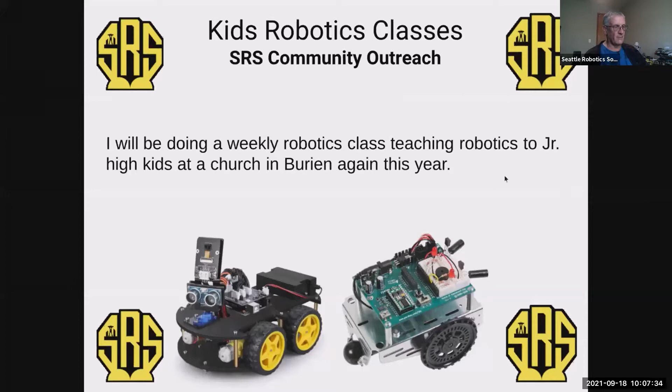I'm looking at some options, and I want to get more into programming with the kids on these things, because we did a lot of hands-on building, and the kids used the little black robot with the camera on top. I added some hardware to allow Lego bricks to be built on top of that. Kids had great fun with that, but we found the built-in programs were a little deficient, and some of the remote control stuff didn't work too well. I'd really love to show them some options for how to make that stuff better, and start to teach them a bit about programming. So I'm looking forward to doing some of that this coming year.

If you're not aware, this coming week, starting the 25th, is Drive Electric Week, promoting electric cars of any and all types - homebrew, do-it-yourself conversions, you name it. I'm planning to be at an event up in Mill Creek, about 50 miles north of where I live in Federal Way, almost to Tacoma, so this is on the opposite side of Seattle. If you have any questions, you're welcome to ask, or you can visit Drive Electric Week, which has a calendar of events across the country. Stuff is happening everywhere, so in-person events are starting up again. Last year everything was virtual, and that's just not the same thing.

Coming up a little later, we are going to have Josh Pieper, who is CEO of mjbots Robotics Systems, sharing with us about this very cool four-legged robot that probably reminds you a little bit of somebody else's robot out there. He'll be sharing about that and answering other questions. If you have questions, particularly about starting and running your own robot company, this would be the guy to ask.

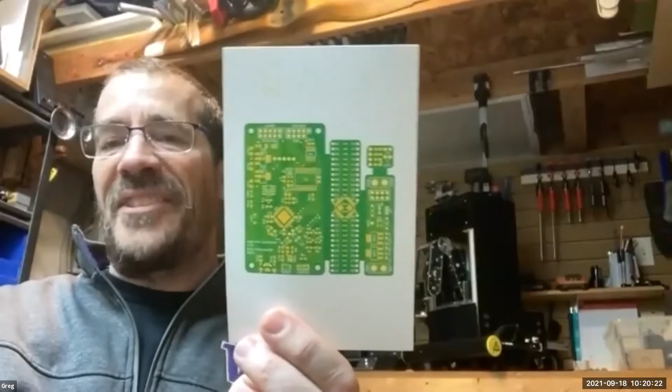I tend, when I order these printed circuit boards, this is what I actually ordered for one of those, because you can get up to 100 millimeters by 100 millimeters for the same price. So I always tend to fill in around the sides with other project boards or other little doodads, and I use that cutter to cut them apart. So I've got the cutter, and I always order a solder mask, and then I have to place the parts, obviously.

The other related project I'm working on is making a hot plate for doing reflow. Around here somewhere I have a Value Village toaster oven which I intended to use, but I like to get up close and watch it happen, so I changed my mind. I'm going with a hot plate. I bought an inexpensive cast iron top hot plate, and then got a quarter inch piece of aluminum to help spread out the heat a little better.

I'm now working on getting a couple thermocouples, and I'll put together a little circuit to control that, and hopefully have the reflow part of it covered. Up to this point I've always used a hot air approach to doing reflow, and it works, but these are bigger boards than I've ever done before, and using hot air is a very tedious approach, sitting there doing it. I could set up something else.

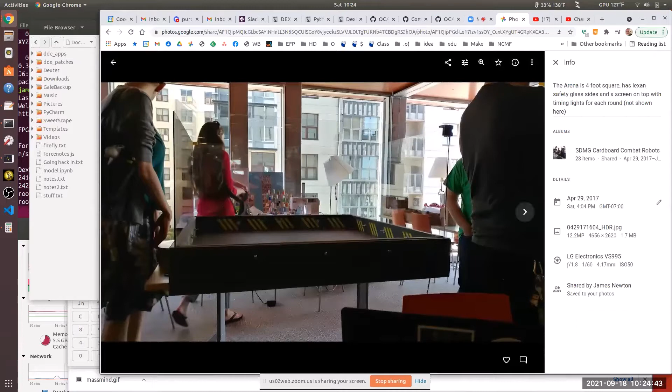Hey, I want to make a pitch real quick for this little cardboard combat robot, for people who are teaching classes with kids. This is something we came up with a while back, with the idea that we wanted to make it really popular for kids to get into robotics. We thought one way to make it more popular was if we built an arena, so we have Lexan sides and a piece of a little arena, and eventually we built a top with lighting and all that kind of stuff with timers.

And we made these with the Node MCU, the little ESP8266. I don't know if anybody's played with those, but they do Wi-Fi and will serve web pages. You can actually program this thing to serve web pages. These are available if you buy them from China for like $2-3 a pop, $8 on Mouser or DigiKey, or you can buy them from Amazon from good reputable sources. And they're programmable with the Arduino IDE with a little bit of tweaking.

This was the first version with these cheap DC gear motors. Then we went on and made other versions that used servo motors, and there's a channel for an ESC, so you can put like a regular RC motor on there. This was one of the weapons that a guy came up with, 3D printed with a bunch of screws in the front, and here's another one.

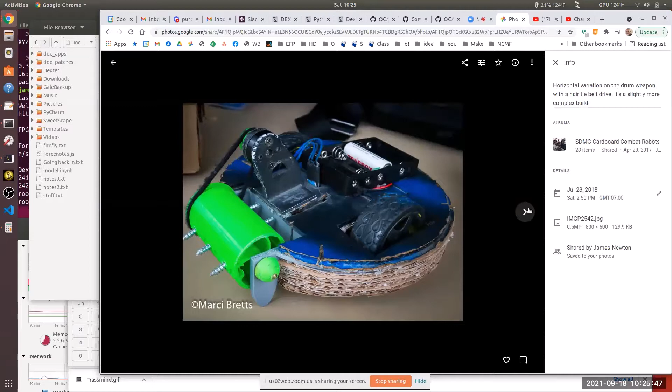Same guy made this one, but it's a drum weapon instead. You can see the little RC motor up here in the belt that was running it, and then he has his gear motors running everything there.

You'll notice some of these look a little bit the worse for wear, and that's because we put them in the arena and battled with them. That is after on that particular robot.

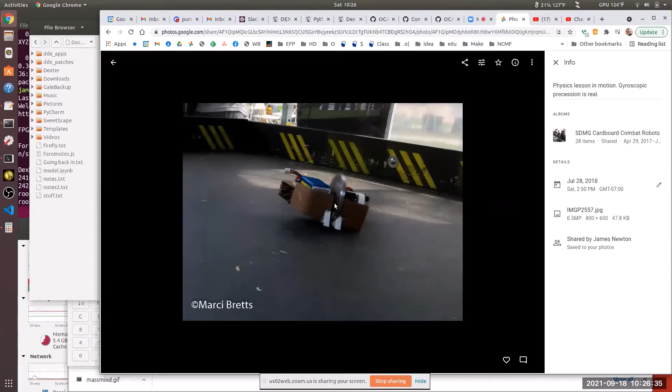That's a spinning disc with an RC motor directly connected to it. It's at an angle there because that thing is spinning so fast that the gyroscopic precession lifts it off the ground whenever he turns it. This is the STD, single tooth disc.

And not all of them were combat bots. People made art bots, and people made just the simple cardboard bot.

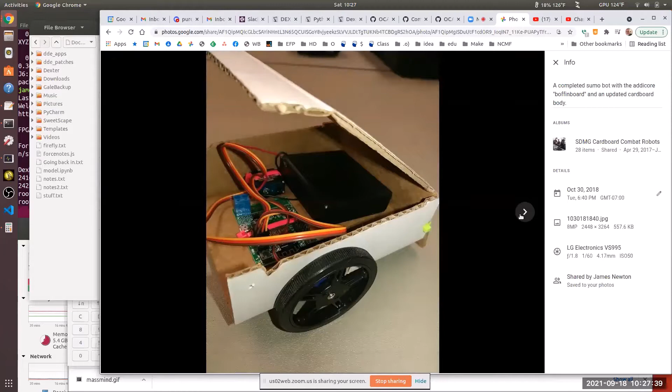It's a couple of servos, hot glue the thing together, and a kid can have that up and running in short time. And if they go in combat with it, and it gets destroyed, it's no big deal. Most of the time the electronics survive, and you can just cut out another body and put it back in there.

These are for a Sumo Bot competition that we did. And this is a way that you can bodge together a servo connector off of the digital pins on this Node MCU version of the ESP8266, just pulling the battery power over into the power and ground rails, and then you can plug in servos on the side.

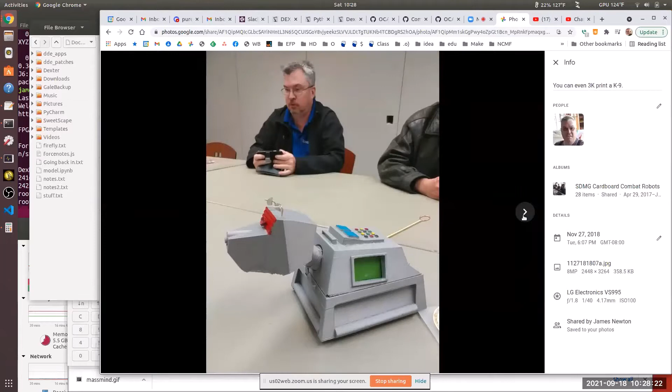Like I said, I've made an adapter board that makes that a lot easier, because that's some pretty tough soldering. It's small. We made a few of those with some groups. There's a 3D printed body that uses the same thing—you can see it there, a little canine.

More than that, another web page that the robot can serve is an editor. So you can edit the files on the robot using a web page on your tablet or your PC or whatever, and then reprogram the code that's in this web page.

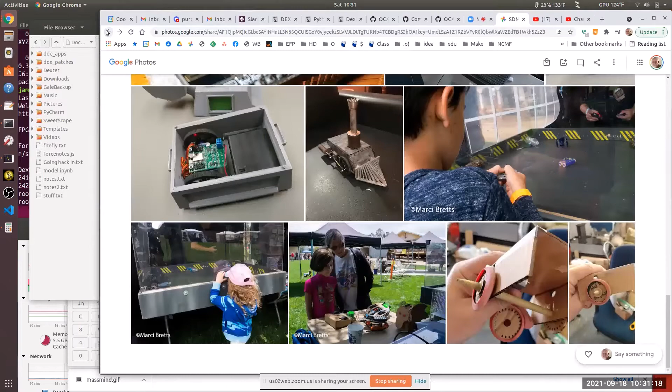Somewhere I have a video showing the self-driving thing, but I couldn't find that in short order. So again, the big advantage of it is that it allows you to have not only the regular programming via the Arduino and C code, but it also supports the programming of what's going on inside the cell phone.

One of the things that I'm not doing, and I would love some help with, is we aren't able to access the sensors in the phone from the web page served from the robot, because phones lock out HTTP non-secure web pages. They won't allow a non-secure web page to access the camera and other sensors in the phone. So we want to upgrade to the ESP32 so that we have enough horsepower to serve HTTPS web pages from the robot, and then we'll actually be able to access the cell phone's sensors.

The idea there is to actually just set the cell phone on the robot, and then you have a fully autonomous robot with the power of your cell phone communicating with the robot via Wi-Fi through a web page that you can edit from the cell phone or from a tablet or whatever. I think it's a really exciting project, and I would love to see more people get involved in it.

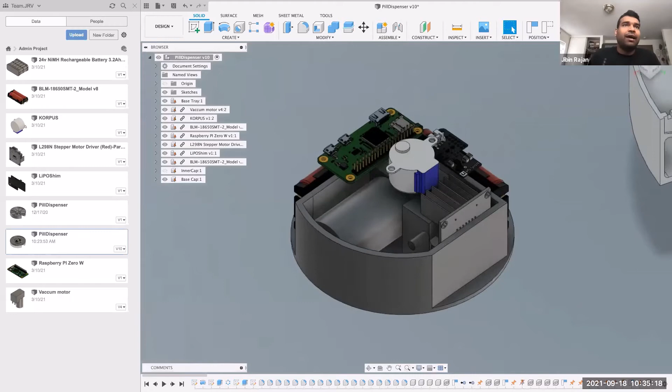The idea is basically to have a small servo motor attached to the other end with an arm so that I can pick pills from various boxes. And here there would be a dispenser, like a cup that can be used, and the rest of it is all software within a Raspberry Pi Zero, which can trigger alerts and trigger these systems to pick the number of pills that are needed according to the frequency my parents would want. This would have an alarm or sound system, connected to Google Home or something like that, so it would alert them at the right time to eat the pills that are in the cup at whatever time they want to take it.

So I wanted to fabricate this and make at least a proof of concept sort of system, which I could take home the next time I go to India. That's something I don't know if it interests a lot of people, but it's something I needed help with because I don't have ready access to a lot of the fabrication stuff like 3D printing.

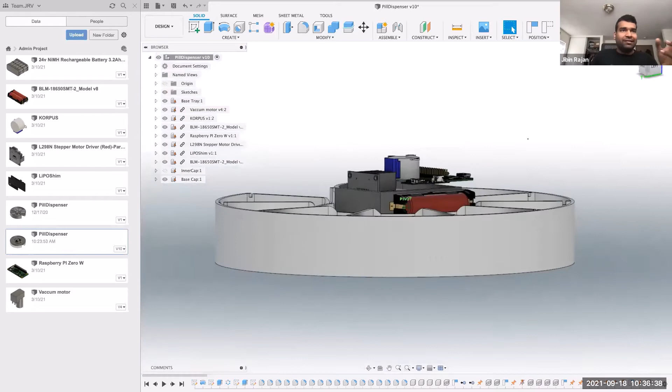I would also like to get expertise from people on how to put all of this together so that everything works right. The idea is to make it so simple that it could work for my parents. I'm pretty sure there are a lot of old people out there who don't take their pills on time. So if it works for them, I want to turn it into a more full-fledged product that can be reused by a lot of people.

That's why this design, if you take a look at it, is basically pills in a box fed by gravity, so the pills are always available at the bottom. And this gripper that I tested works with almost all kinds of pills, so it's agnostic to the shape of the pills.

The idea is to make it really small, so it should ideally contain just a base cap and a top cap, and that should be about it. You just load the pills into this, and then set the frequency of the number of pills to be taken from which slot.

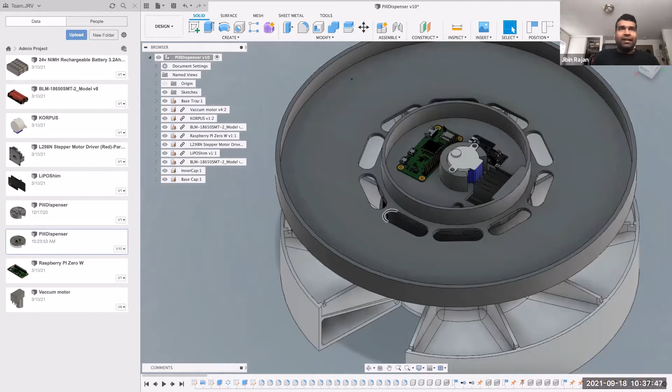Once all of that is set up in the software, the servo motor would have an arm and a small mechanism to go down into the pockets and take the right pills. With just that, it should be cheap and easy to manufacture, which is what I want. So I reduced the number of parts in the mechanism as low as I can.

It's literally just 2 motors, a motor controller, a servo controller, a Raspberry Pi, and normal batteries around it. So I would like your inputs on this design, and I'd like to know if anyone can reach out to me. I'll share my email so that if someone can help me out with fabrication or how to bring it to fruition, that would be really awesome. That's about it for me.

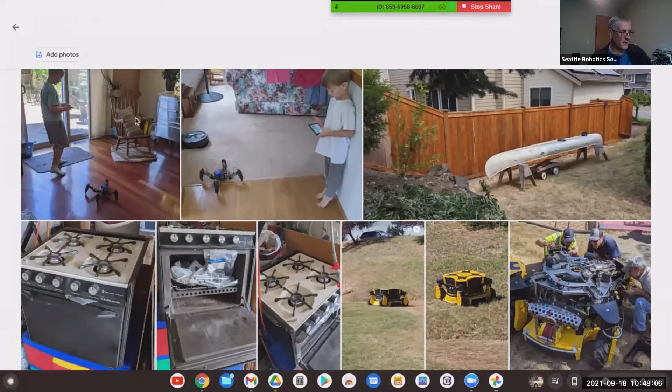Seeing Google Photos there and seeing some pictures?

This is what my niece's son is playing with, one of my little MekaMons here, a little four-legged spider type robot. He and his brother love these things, but you can do battles and other things with them. They thought that was pretty cool.

This is a little guy, he's 4, actually I think he's almost 5 now, but he's a neighbor across the street, and he was having a pretty good time playing around with one of these little guys too. It's amazing how easy these things are for little ones to play with.

And back to this, the vacuum, one of those Shark vacuums that's self-emptying. It's got the vacuum base, and then it has a video camera on top of it, so it maps your house and then it can figure out where it is. That's pretty cool.

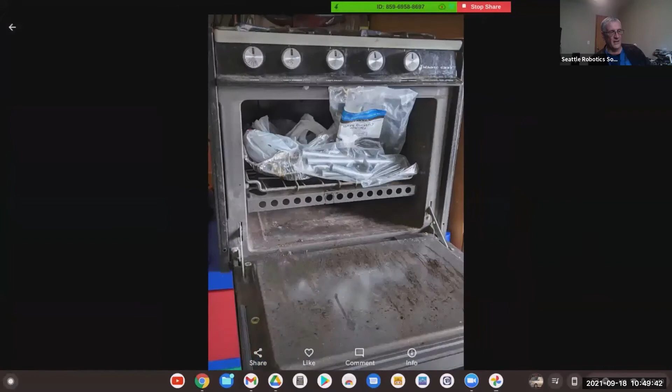So anyway, back to robotics.

This was serendipitous. My wife and I went to a park, and these guys pull up, this guy pulls up in a beautiful brand new pickup truck with this interesting machine in the bed, and apparently it's for cutting grass on steep hillsides. As you can imagine, if you're on that hillside sitting on a riding mower or trying to run a push mower up it, that can be pretty challenging.

So this little thing has 4-wheel drive. You can see that the 4 wheels allow it to translate in its movement, so it can go anywhere. It's being remotely controlled, as far as I know it's not autonomous in any way, but it is remote control. I'll show you a picture of that.

It has a winch that can be used, on the opposite side of what you're looking at here. He demoed that for some guys from the Park Service that takes care of grass cutting in these places. You can take that winch and hook it up to, let's say, a tree or a vehicle sitting up on top of the hillside, and then the robot can keep its position or pull itself up the hill. He said it can go up to about a 50-degree angled slope pretty comfortably.

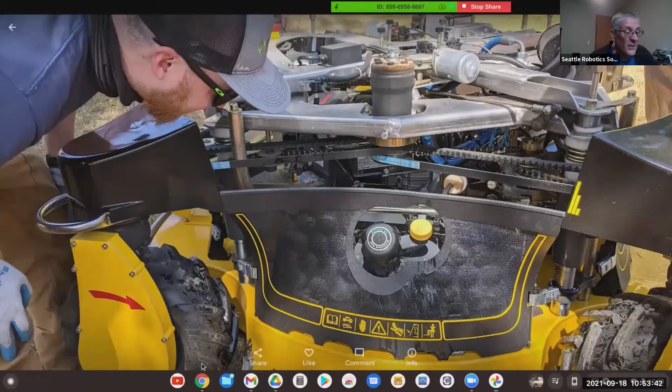You can kind of see on the tires there, some of the oil. You could see it was wet all over the place inside, but yet when he would start it up, there was no sign of oil leaking from anywhere. So it was kind of strange, almost like it healed itself, but I'm guessing it didn't really do that, because machines, if they leak, there's a good reason for it.

And I love these situations where somebody else's robot is having trouble, and it's everything you can do to control yourself from wanting to dig in and fix it. Right? Tell me you didn't want to do that. Oh, it was tempting. I was asking them questions about it, but trying not to, since the guy was there to do this demonstration for these park service workers. I didn't want to get in the middle of that, but at the same time, it's like, oh, this is just a really cool machine. Tell me more.

I did ask some of them though, I said, well, how do you guys normally cut this grass? And they were talking about things like, you take a push mower and tie a rope to it, and you stand at the top of the hill and lower the thing down and pull it up, lower it down and pull it up. It's like, yikes, that was a pretty good sized hillside altogether, so that'd be a lot of work to do that. And getting around, because of the trees, you wouldn't be able to stand at the very top of the hill because the tree would be in the way, so you'd end up having to go around to the hillside of the tree to get down there. Not a pleasant proposition.

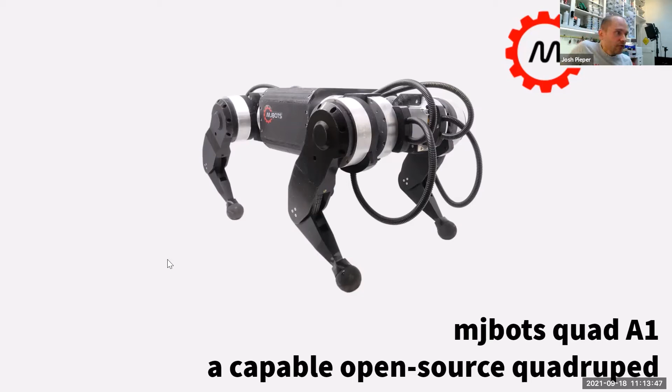This is me, Steve already introduced me. I got my professional start building autonomous underwater vehicles at Bluefin Robotics.

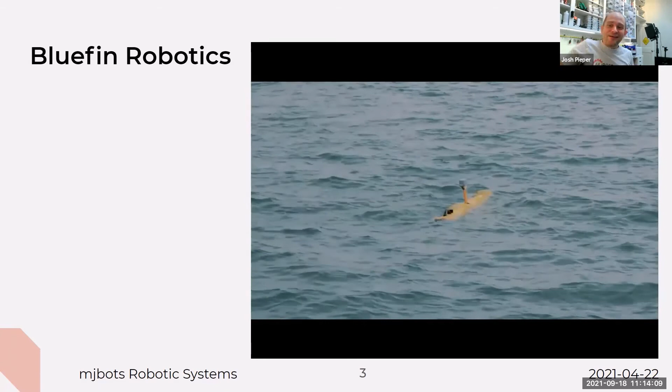Those are marine systems. People were mentioning earlier that high voltage and water don't mix, and I can attest that it's definitely true, especially with salt water. It's even worse. Fortunately, the software side of these systems was fun but not terribly hard, because robots just assume the entire ocean is free and you can go anywhere you want. If you hit something, you got unlucky. But a lot of the work was maintaining fault tolerance and dealing with high voltage electricity and corrosive salt water, making the machines continue to work.

Carl, I had to exit my browser and start over again. And when I came back in I had no audio, so I had to do that again. The second time I came back in the stars aligned. Okay, I'm going to jump out and in again. I'm trying to use the Zoom client on Windows 10 and it's just not behaving right. Okay, I'll be back in a minute. Well, let's just blame this on Zoom. Everybody's good with that? Steve, I don't think it's anything you did, it was too coincidental that Zoom wanted to update. Do you think Zoom pushed an update in the middle of the meeting? They did in my case, they forced it on me, and now it's behaving like crap. Oh jeez, I'll be back in a minute.

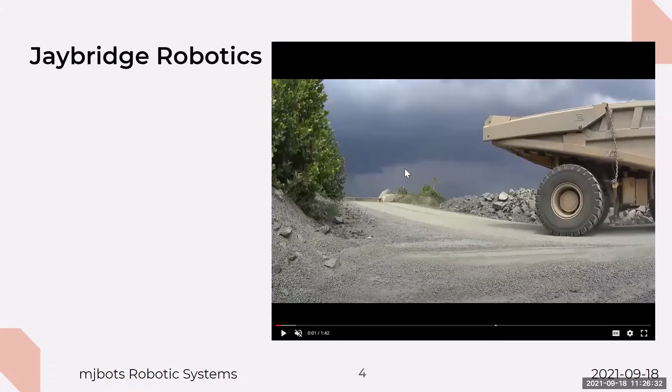Let me try to share my screen again. Which one do I want? This one, perhaps. Can everyone see my screen share again? Yes, great. Were you able to see the videos I was playing before? People who were on, yes. At Zoom frame rates at least? All right, see anything? No one. Well, I will continue, if at least someone can see it I'll call it good enough here, and I'll leave the rest for recording. Oh, let me jump in for just a second - if anybody doesn't have their mic muted, I will follow suit and do the same. So please mute your mics.

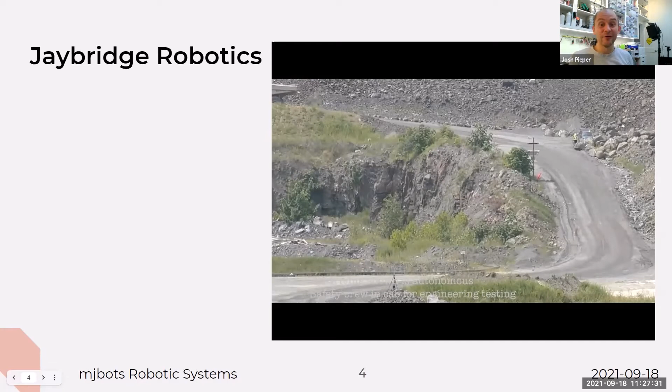Great, so back to where I've worked. At Jaybridge Robotics we developed automation for off-road industrial vehicles. This is a video showing a quarry automation system we developed, which would let one vehicle record a path, and then you could have any number of vehicles follow it, which is common in a quarrying situation. There'll be like 2, 3, 4, 5 trucks all doing the same thing all day long, going from where they're blasting the rock to the crusher where they crush it.

We also developed a system for agriculture and tractors that could automate harvesting and planting. The coolest part for me was when random people would drive by and see our systems operating. This is a random YouTube video from some passerby who saw our tractor driving along with no one in it and was like, what the heck is this? It's just going around doing its thing. That was some of the coolest part about professional robots, getting to see things work, because this would just go all day long, going back and forth between collecting grain from a combine and taking it back to the semi-truck all day long.

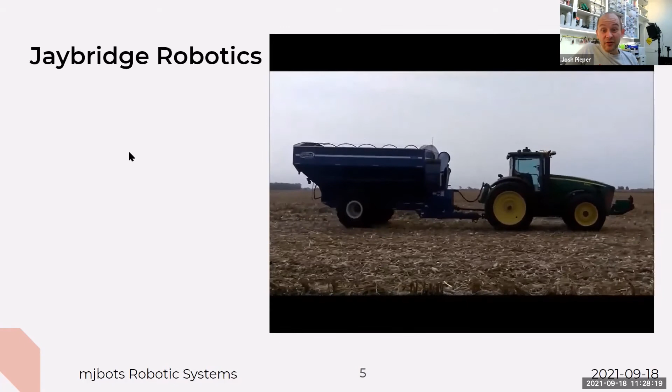I don't know if Steve has a place for these. They're all public YouTube videos, so eventually if you want to see the whole thing, you can switch to those.

We took Jaybridge, both ag and mining, had a really rough stretch, so we sold the company to Toyota Research Institute, and I worked there for a while on their self-driving car program. This is some semi-marketing speak covering the platform. I mostly worked on their software systems, developing the infrastructure that recorded gigabytes per second of data from many sensors and let researchers analyze that and make sense of it to develop new algorithms.

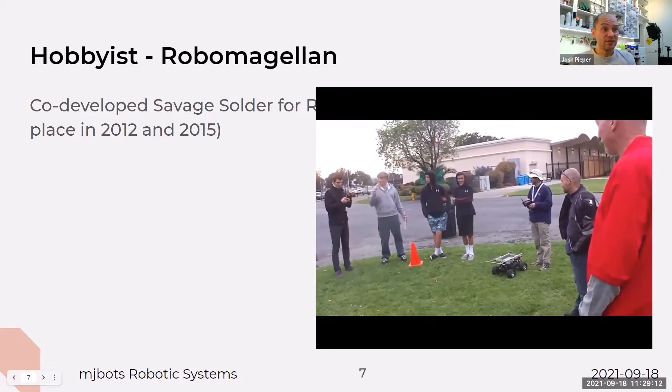Let me switch on here. I've done a lot of hobby work as well. A friend and I from Jaybridge entered in a number of Robo Games competitions. This is Robomagellan, which was founded at SRS long ago. Thank you SRS for that.

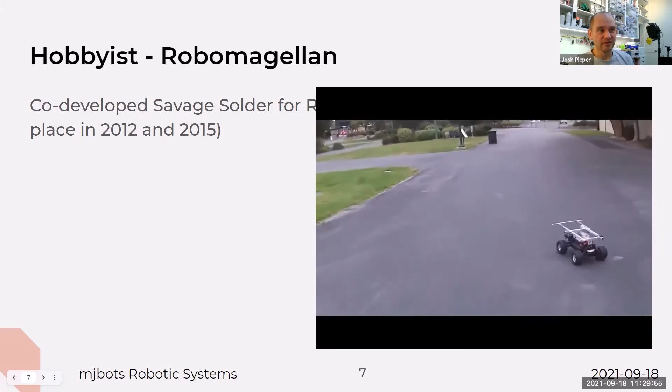We did this just for fun at Robo Games in San Francisco. Of the 3 years we entered, we won 2 of them, and one year the machine destroyed itself. But those competitions are a lot of fun. This is just an off-road RC car, this version has an Odroid. The first year we just strapped a laptop on top, same basic software. When it was running well, it could go pretty fast, like 12 miles an hour, and it used vision to identify the cones, and didn't use vision for anything else aside from seeing the cones in Robomagellan.

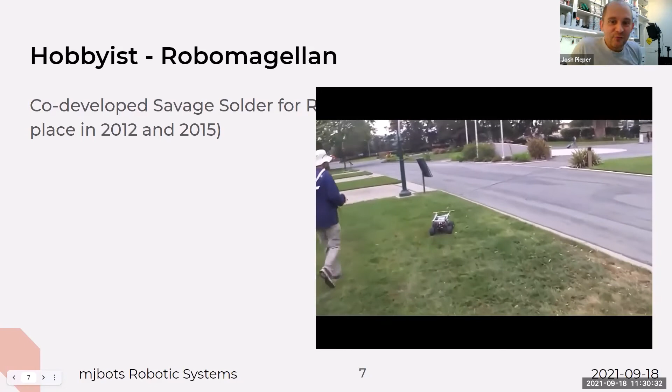It just used a relatively accurate WAAS-capable GPS, which was enough to drive through the narrow spots in the San Francisco course. This video was our winning run in 2015, where they, perhaps expecting no one would hit it, put a cone way out in the back, which they denoted as a 0.001 time bonus cone that they assumed no one would manage to hit. We got it, which made our official time be like 2 seconds for the run, making it the fastest timed run in their history, but not because it was particularly fast, just because we hit this hard to find cone.

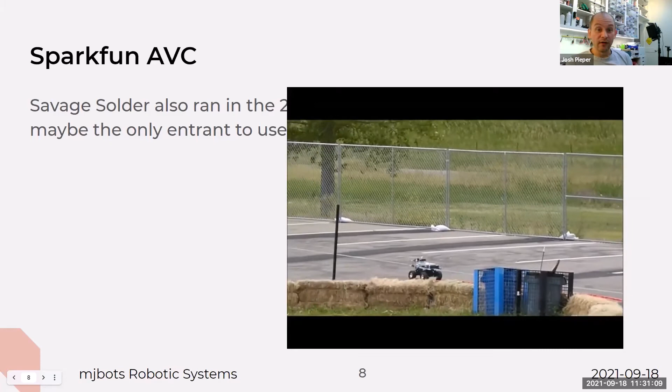A similar version of the car also ran in the Sparkfun autonomous vehicle competition for a few years. In that event you just go around a track. The years we did it, they had various obstacles or bonuses you could hit. This year there were barrels you had to avoid, a hoop you could go through, and a ramp you could jump. This version was maybe a slightly older one with a mini ITX computer inside an aluminum case, but it used cameras to avoid the barrels, go through the hoop, and jump over the ramp as it went through the course.

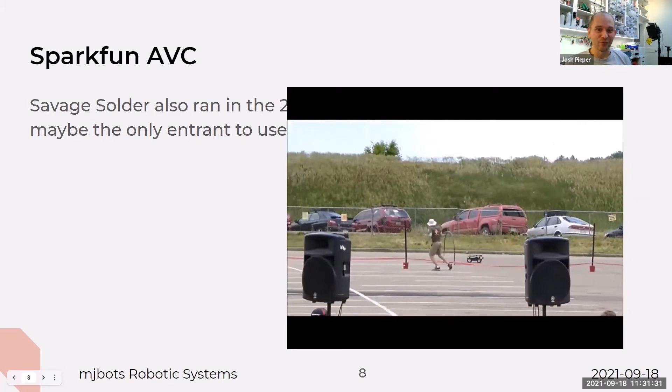I think we got second place one year in this event. The rules weren't as forgiving, they were very biased towards consistency, and ours was high performance but not necessarily the most reliable. So we'd get like 2 runs that would work and 1 run that would explode for some reason. But I'll let this one run until it hits the ramp, because this event had a ramp which was very perilous - you'd either hit it all the way or miss it, and if you got it part way, usually your robot would crash. So here we used a camera to find it so it could take the ramp and go over.

Let me skip ahead then. For some reason all my slides lost... oh, that's what happened. Well, anyway, the text is missing on all my slides.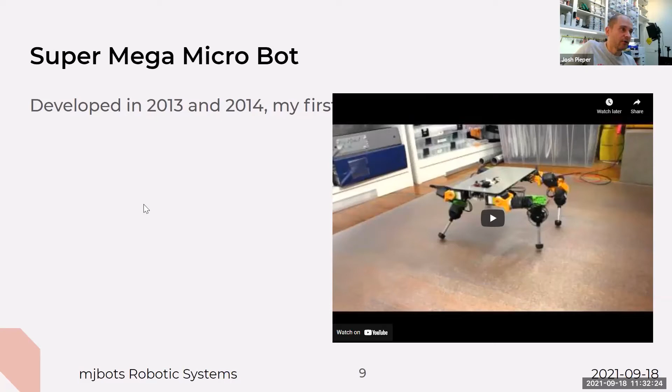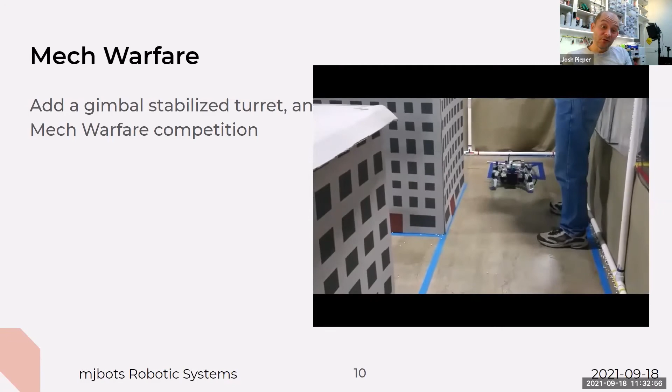We took that system - this was the same friend and I - and put an inertially stabilized gimbalized airsoft turret on top of it and entered it in the Mech Warfare competition, where you get to FPV, so teleoperate the machines and fire against detector targets on other robots. This was a lot of fun. Once again our machine was very high performing when it worked well, because we could shoot while moving, which no other machines could do. The downside was that it used USB and all kinds of other stuff, so occasionally it would flake out and just die. This was a run where it won because it was able to shoot while walking around because of the stabilized camera and video.

So that's a little bit of my background.

Now I'm going to go into the story of this Quad A1's development. I started from that hobby servo machine back in 2013 and wanted to make something more capable of doing dynamic maneuvers. But there's a lot to do from going with off-the-shelf hobby servos to a machine that can run fast over open ground.

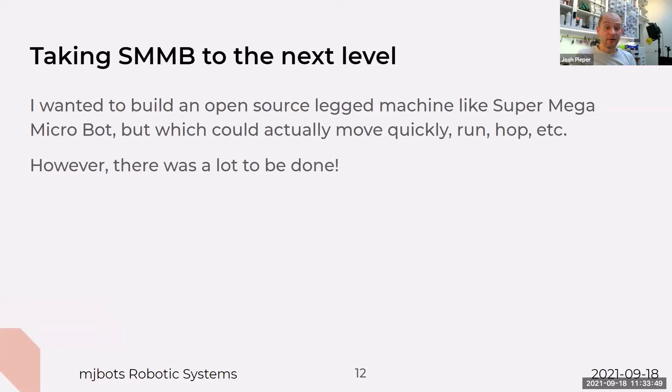For the purposes of this presentation, I broke it up into 3 semi-discrete thrusts, although in practice it was all kind of intermingled craziness, as you'd imagine with a complex project where lots of things were happening.

One was doing motor control using field-oriented control to control brushless motors. Another was building a reducer for those so you can have higher torque and lower maximum speed, because brushless motors in the size class you're looking for are still too fast and too low torque for legged machines. And then building a chassis and leg hardware to turn that into a full robot.

So I've got some random videos and pictures showing the development in those 3 different domains, going towards this overall robot.

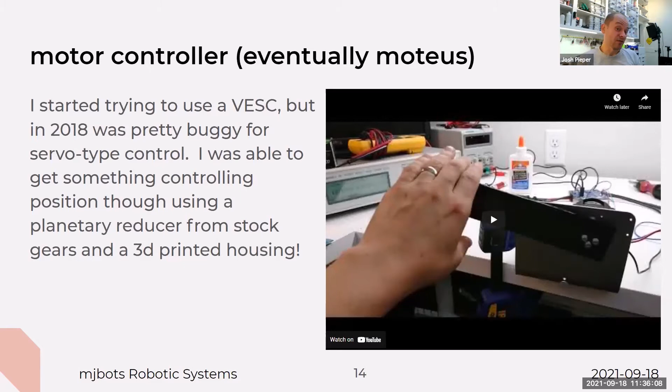And also I wanted to make everything permissively licensed open source, and the VESC was not suitable for that. So I decided to make my own motor controller.

So I started with a TI gate driver, the DRV 8323, which is what I used. I built a very small board based on its reference design and an STM32. This was probably R1, one of the first revisions.

This revision used an RS485 bus, so it's like a smart servo, but for brushless motors. It would do force control and force feedback, as well as position control.

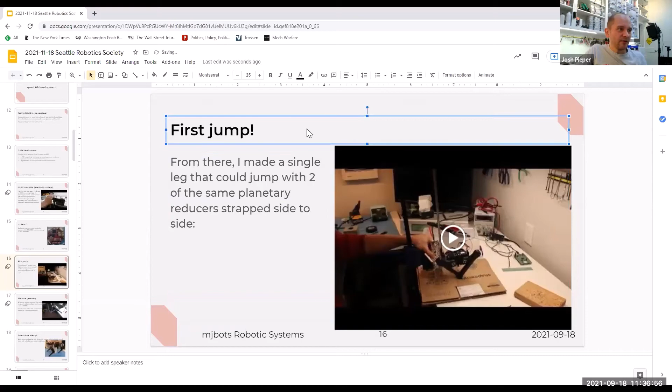I took that and used basically the same planetary gearbox I had before, built two of them side by side with a parallel linkage leg, kind of looks like a leg, set it up on a linear rail, and made it jump. This was the first day I got that leg to jump by putting force down and going up in the air.

So this was a proof of concept that yes, I could make force, apply it through trajectory, and make something jump off the ground with a fair amount of force, and get that to work.

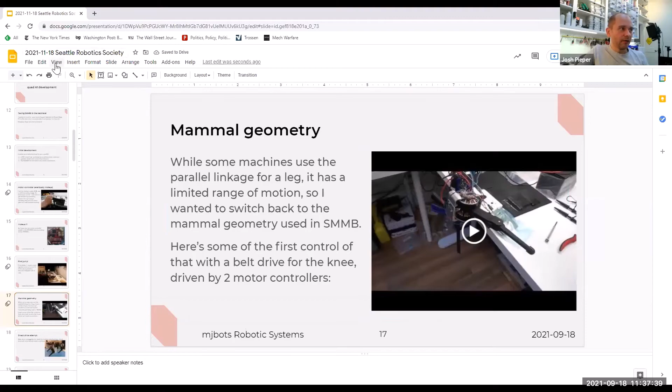It wasn't terribly practical for a number of reasons. One was that the leg geometry was not super suitable for a whole robot, because that geometry of parallel linkage takes up a lot of space.

So I next iterated and designed an entire new leg with similar geometry to what we used on that servo-driven robot, except this time the knee joint is driven by a belt, and there are two motors that face in towards each other. One drives the upper leg and one drives the belt, which then makes the knee go.

That way there's really no motors on the moving parts of the leg, which reduces the inertia a lot, which lets it be more dynamic. And so that was the first video showing that working.

I'll skip on to the next. So I took that and said, I'm going to push forward and make a whole robot based on it.

So I built 4 legs, stuck a yaw joint on, put it on a chassis, and built it together and crossed my fingers, with minimal math saying maybe it's feasible. And of course, the answer was no, it's not super feasible.

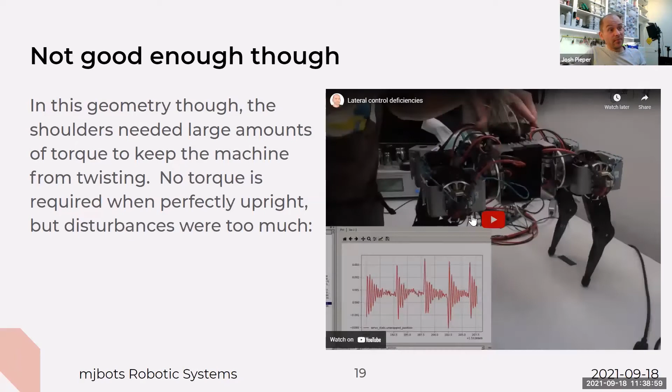While there was nominally enough torque for that to work, the overall bandwidth of the control wasn't really sufficient, especially in the joints I expected to need the least, the shoulder joints, which nominally need zero torque when standing. It actually takes a lot of torque to restore from disturbances in the roll axis, and that made the machine relatively incapable of standing up, much less walking.

This is just a video showing how wiggly it was in the roll domain. If you tip it sideways, there just wasn't enough restorative force to keep it upright. The motors can put out a lot of torque, but as you see there, it tipped over all the way.

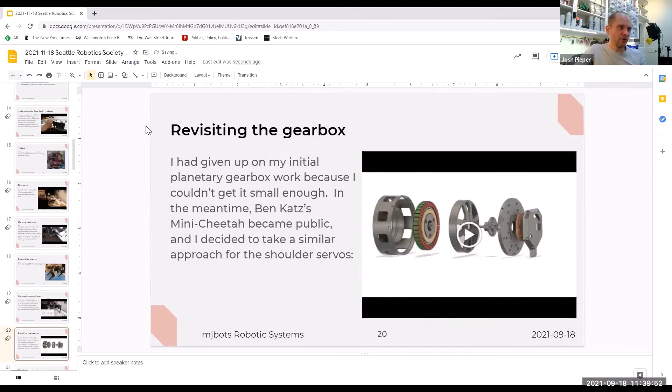So about the same time as this is when the Mini Cheetah by Ben Katz was released, and I decided to somewhat steal his idea of putting a planetary gearbox inside the stator of a brushless motor.

The problem I had with my planetary gearbox before is it was too big to make for an actual usable leg. But by putting the planetary gearbox inside the stator, it makes the whole motor assembly not much bigger than the motor was originally. You still need a little extra stuff for the housing and for the controller, but with that approach it would let me get a 6 to 10x reduction, which would make the whole machine more feasible.

So I designed that. We saw the CAD blowout. I did an initial fit check with 3D printing, but in order to do a frameless motor design, the rotor and the stator have to be aligned within about 0.005 of an inch to not crash into each other, which you can't really do in plastic. Even engineering plastics flex too much to make that happen, so you have to use metal.

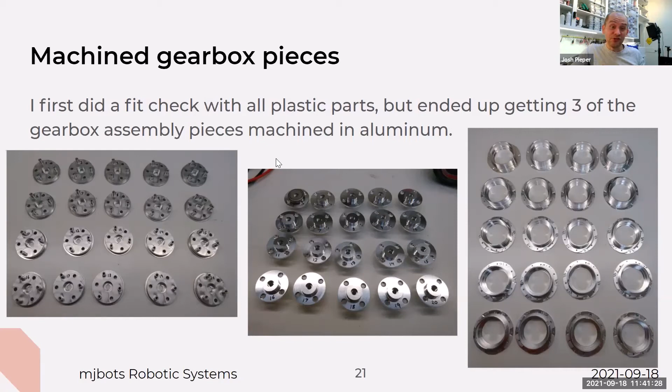For my first design, I made the smallest number of pieces machined, which were 3 of the 7-piece assembly, machined in aluminum. I designed those and sent them off to a job shop and hoped for the best. Actually 2 of the 3 worked the first time, and the other one only needed 1 revision, which for my first machining design I consider a pretty good success.

This is a picture showing all the parts for one of the servos in the Quad A0, which I took an existing off-the-shelf 8108 brushless motor and used a mill to disassemble and rip apart, then reassembled around these parts. Those are all the parts that went into one servo on the original Quad A0: the stator and the rotor, the 3 aluminum machined pieces, some off-the-shelf gears, a ring gear which I had to post-machine on a lathe, some bearings, the controller, a bunch of 3D printed parts, and a whole bunch of inserts and screws. That's what went into one of the servos on the Quad A0.

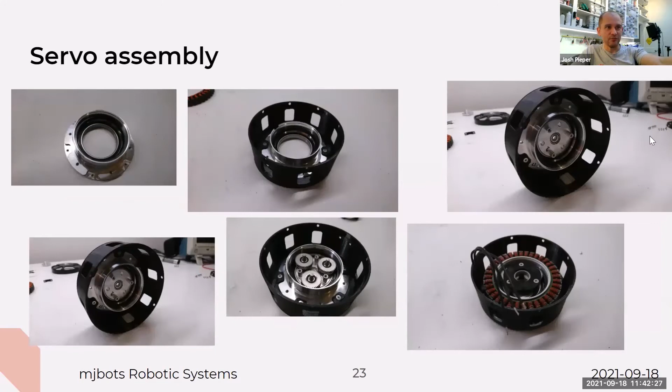I went too far forward. These are just some pictures showing the assembly process, starting from putting the gear in, to putting that external 3D printed housing on, and putting the stator in.

This got me closer, but not there. This machine was able to walk, kind of. It had those servos for the 4 joints that controlled abduction on each of the legs, and still had direct drive for the upper and lower leg. Here's a video showing it walk. It was able to move, but once I added the weight of all those bearings and stuff onto the servos, the direct drives were no longer sufficient to allow for reliable control.

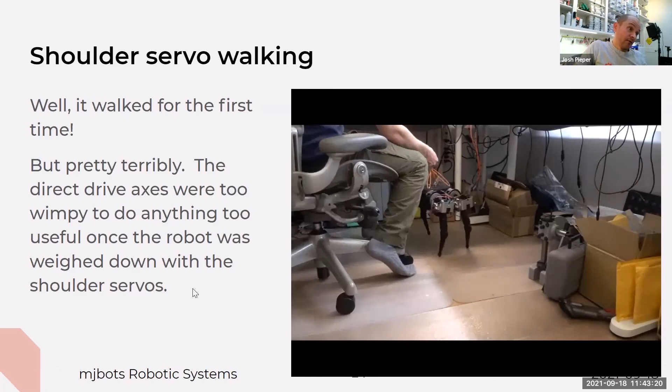So the iteration again was building enough servos for every joint, which I buckled down and did. At this point, I was trying to enter this as a forcing function into a Mech Warfare event, and I had about a month left. So I spent 3 weeks working like 90 hours a week building servos, because each one took like 3 man-days of effort to build. I built 8 more plus a spare 2 servos, and designed a new leg based around those servos, which has the 2 servos facing inward, same basic design but with the gear reducers.

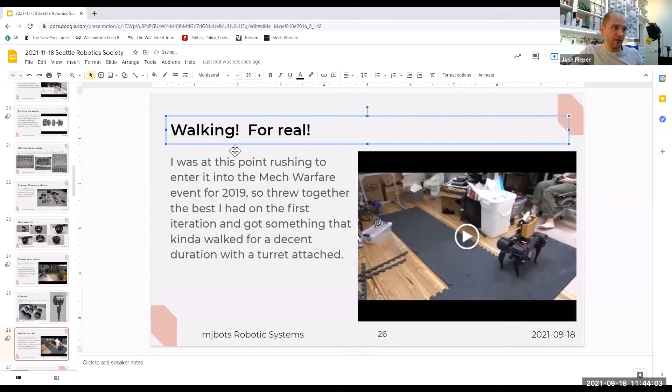This was able to walk more reliably, for a couple hours at a time without breaking, which was better than anything I had before. Still wasn't very good, but it worked. It worked better without the gimbal-stabilized turret on top, which added an extra kilo or two to the weight. This was a demo video I took for Mech Warfare where I walked around for 30 minutes slowly, but it did walk standing under its own power, and was able to shoot some airsoft BBs around.

That said, you can look at that video and tell it's not running. It's actually probably slower to move than any of the hobby servo machines out there, but it had promise.

So I did yet another iteration. But before that, I'll switch gears and talk about all the other things that had to happen beside the motor to make this robot work, of which there are, of course, more.

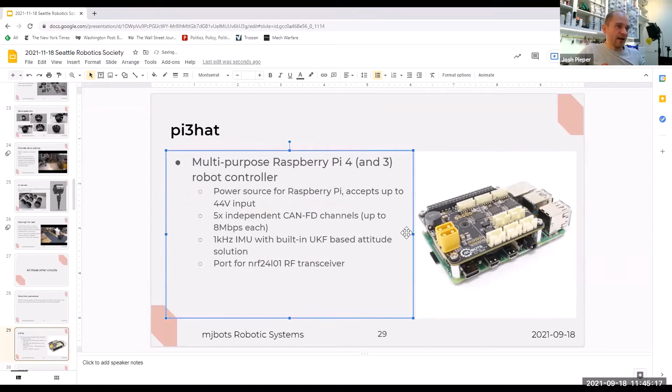There are a number of other boards I built, designed, and wrote firmware for. One was this pi3hat, a Raspberry Pi hat with 5 CAN FD ports, power conversion so it can run from the battery bus voltage, and an inertial measurement unit running an onboard Kalman filter to provide an attitude solution. It also has an nRF24L01 receiver, useful for things like robo games because the Wi-Fi environment there is absolutely terrible and you can't use Wi-Fi effectively. But I don't actually use that much anymore since there haven't been events in 2 years where the Wi-Fi environment is terrible—crossing fingers someday there'll be events again. So that connects via the SPI buses on the Raspberry Pi and lets it command and control all the servos as well as having an IMU.

Also, I've got this power distribution board. Once you have 12 servos attached to a battery, there's a lot of capacitance on the bus, so if you just plug it in you'll get a big spark, and the inductive spike can overvoltage everything on the bus. This does pre-charging effectively and also monitors the power on the bus so the robot can tell how much power it's using, and it has a soft switch so it can turn itself off more slowly.

So those are the other circuits. However, as you saw, that quad A0 still barely walked, and when I took it to Robo Games, it actually broke after about an hour of walking because the 3D printed parts consumed themselves under the load, which was not too unexpected, but it happened. Yeah, this has been a very long process—I started with that hobby servo in 2013, and it's 2021 now. Many steps.

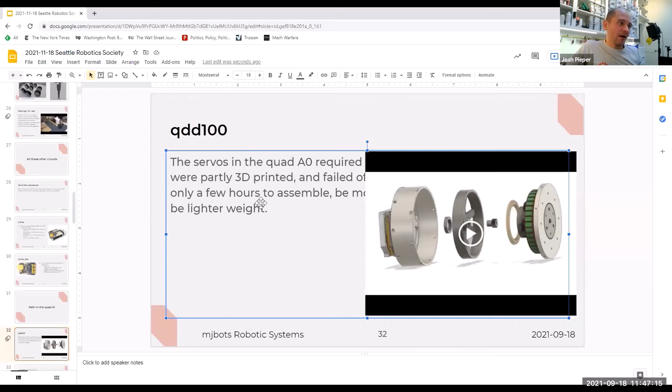But moving on to the quad A1, I redesigned the servo to not have 3D printed parts in it, or at least basically none, both to make it more reliable and to reduce weight. The 3D printed parts had to be extremely bulky to last even as long as they did, which made the motors and the whole robot pretty chunky. And that gearbox, as I mentioned, took like 3 man-days per gearbox to assemble and build, which was an unreasonable amount of effort if you wanted to make more than one of these—nearly a month of full-time effort to make one robot.

So I designed a new version here, shown in this CAD explosion, which has mostly machined parts and only takes an hour or two to assemble from individual pieces, making it more feasible to build a robot—like a day or two to build a robot's worth of servos instead of a month.

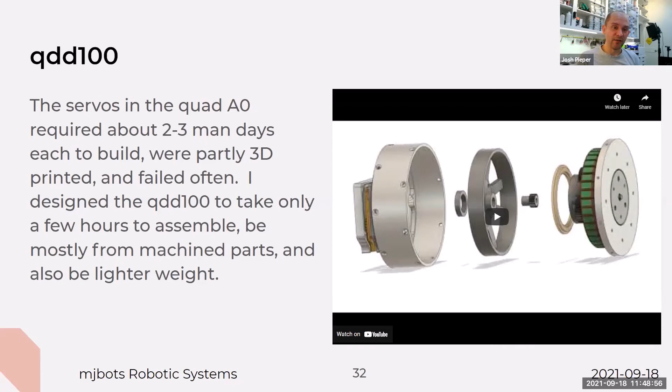Bob asked what material I used for the 3D printed parts—basically everything I've 3D printed that you see here has been PETG, all on a Prusa Mark III S. Mostly because everything is mechanical, surviving loads, and in many cases potentially hot. PETG is super easy to print on a Prusa and gives excellent results. With the Prusas, I have multiple with more than 400 days of print time on them, and they have one failure a month or so—super reliable, a no-brainer. Thanks for that question, Bob.

So that was the CAD explosion from my QDD 100. For this version, I took one of those detours we often do, where I wanted to get more familiar with how to manufacture it, and also wanted to be able to iterate more quickly rather than sending things out to job shops.

So I got a desktop 5-axis mill, spent a lot of time on YouTube watching CNC machining videos, and machined multiple iterations of all the parts for this on the Pocket NC. It was very instructive, I'm glad I learned it. It took a lot of time, especially since this desktop mill is not particularly a VMC, so it's not fast. It goes pretty slow, and the machining time for one servo's worth of parts was like a week or more. So the assembly time was fast compared to that.

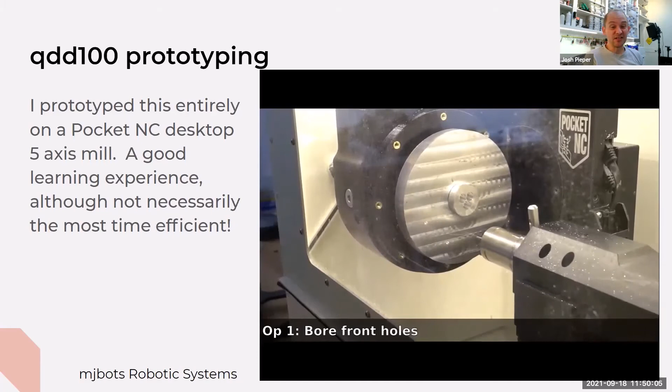If I did everything on the Pocket NC to machine it all, it would be slow for prototyping purposes — it's not infeasible because it's okay to take a week to machine one servo's worth of prototypes, especially since sending out even one part to a job shop often takes more than a week of turnaround time. So I'm glad I learned it. It was fun, I built the whole prototype.

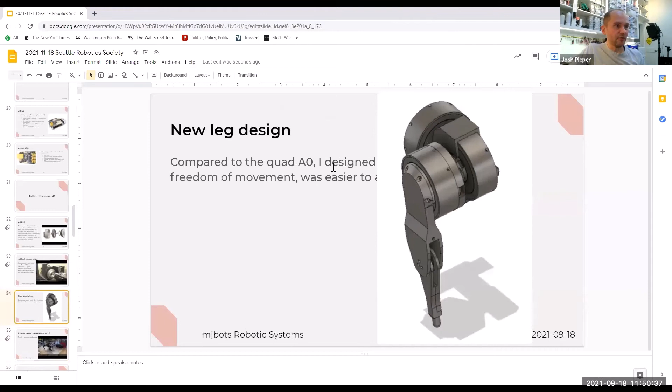I also redesigned the leg so that instead of having concentrically facing motors, the motors were serial in design. There's the same abduction joint which swings the whole leg in and out, and there's the upper motor joint that actually moves the whole lower motor, while the lower motor joint is rigidly fixed to the upper leg and has a pulley inside to drive the belt. There's slightly more inertia because the upper motor is now spinning the whole lower motor, but it's still relatively concentrated in the shoulder joint, so there's not that much inertia. This means the leg can now spin basically 360 degrees, modulo wiring challenges.

James asked if it causes more cantilevering, and yes, it definitely does. These servos were designed around that level of loading, so it's workable — there's a bearing in the surface that transfers the load.

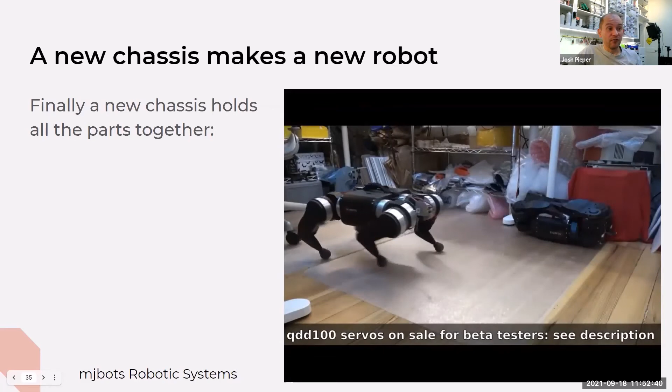When I took this video, that was the extent of the speed it could move, but that's still even better than the one I took to Mech Warfare, the Robo Games. And it didn't break — the servos were way faster to build.

For the production servos, I still had a machine shop build the bulk versions — I didn't do those on the Pocket NC. So in that sense, it didn't actually take that long to build either.

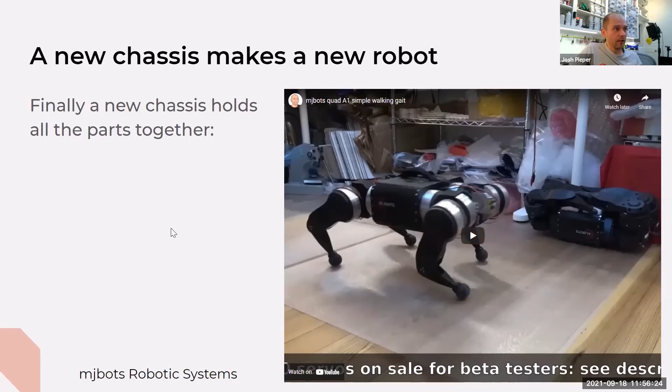From the software perspective, I had a simulator we made for our hobby robot in 2013, based on Dart, a dynamics toolkit out of a university. I revamped or resurrected that. It's like 500 lines of code, but it runs in lockstep with our actual robot software on a desktop machine, so you can test things out on the computer. It's not super realistic, but accurate enough to check many situations and see if the torques and powers are sufficient to execute a maneuver.

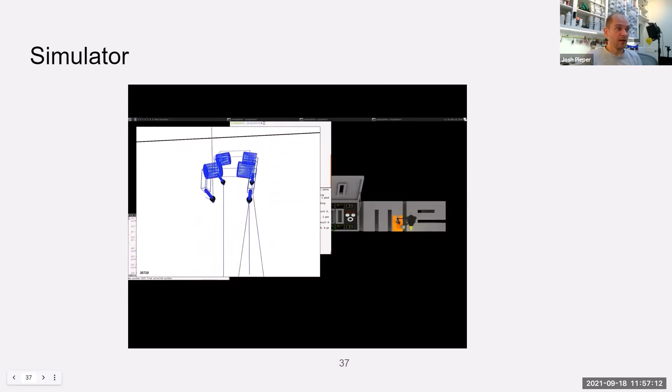I haven't invested a lot of time in making it realistic, so it can do things like that hopping, which the robot can actually do. In the simulation, I've got it to do a backflip, although it can't do that in real life.

I invested a lot of effort in making a telemetry and replay system, which captures all the data the robot records from the joints, as well as from the IMU at the full rate. The robot runs its control loop at 400 Hertz, which results in a fair amount of data being recorded. That all gets stored in real time on a Raspberry Pi, which you can then look at after the fact.

You can look at it synchronized with video and a 3D replay of where the foot positions are in time. You can also plot any arbitrary values in a 2D time domain and play that forward or backwards, or step in time steps, which lets you actually make progress on the things you want to do, which is making the gaits better. So in that first video you saw of it walking, it was still using the same basic technique we used for the hobby servo robot, which let it go maybe a half meter a second max.

So I got questions about what simulation software that was. It wasn't Drake. Drake was actually developed at TRI where I worked for Toyota, but that simulation software was Dart, D-A-R-T, which is much older, but it worked.

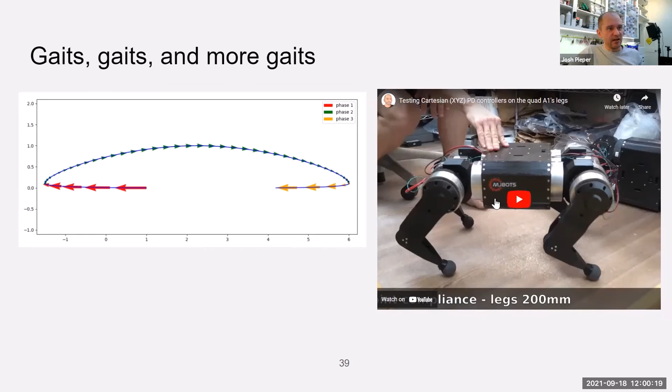I did some work to make some of the control be done in Cartesian space, which made the compliance more robust. Previously compliance was done just on a per-joint basis, but once done in Cartesian space, you can have a lot less jiggling while being more compliant. This is a video showing that.

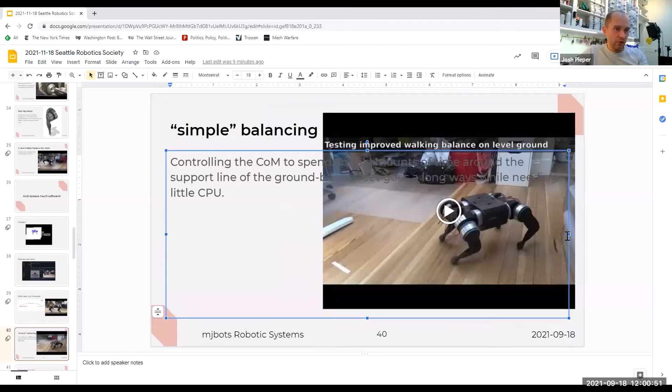Let's skip ahead. I did a bit of work on a simple balancing controller, which isn't really a controller so much as it plans when the legs pick up and set down to keep the center of mass equally spaced around the center of support, which is only roughly true, but it still allows it to go much faster. This is probably walking through a bunch of different lateral and translation maneuvers at up to a meter a second, and it doesn't tip around or wobble too much.

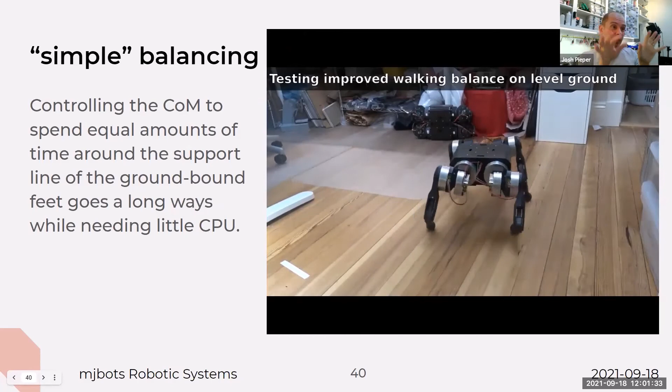A lot of what you see in a hobby servo quadruped, if it picks its feet up very long, it'll tip over side to side because it's not well balanced. That's one of the advantages of this high control rate machine with the planning, it's able to keep itself relatively balanced, though there's certainly room for even better results than this.

Let's skip on to the next. I set up the IMU and did a lot of 3D geometry so it could accurately keep its balance even when operating on hills.

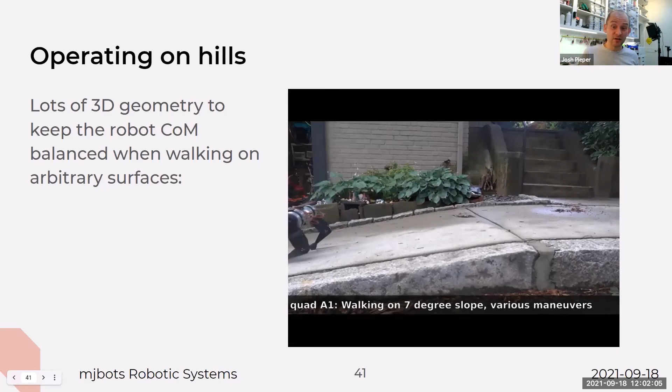This is a video of it walking on roughly a 7-degree slope. As it gets on the hill, it shifts its center of gravity so it stays above the legs, maintaining balance even on a hill. If you've ever seen someone try to take a hobby servo-based machine on a hill, tuned well for flat ground, you'll see it won't really work at all on hills.

Question: is this thing remote controlled, or using some path planning or obstacle avoidance algorithm?

All the videos here are purely teleoperated. There's no onboard autonomy at all. The control you send is translation and rotational velocity, and a body attitude to maintain, so all of this is just piloting with the joystick. In fact, the Raspberry Pi uses basically all of its processors to run this gait engine, so there's really no room left to do anything sophisticated from an autonomy perspective. Anyway, you can see it shifting its center balance from the side, which is easier to see.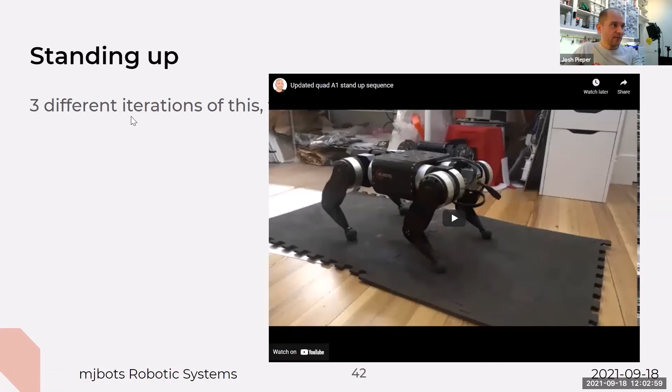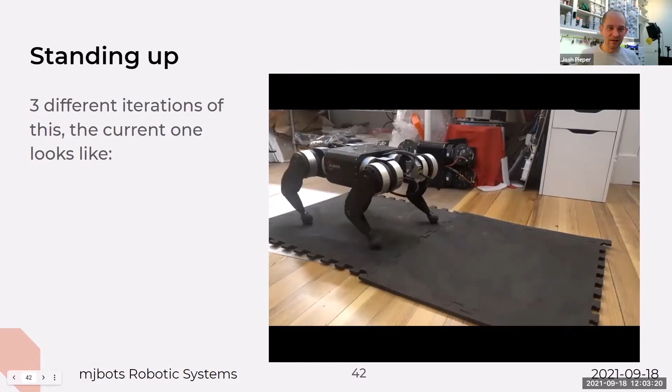I did 3 different iterations over time of getting it to stand up from the ground so it could work on more varied terrain. This is the current one, where it picks up its legs to clear the ground, positions them precisely, then pushes them down. That whole phase is kind of fixed, and once it's standing, it enters the normal gait engine. This lets it stand up from grass, leaves, hills, grippy surfaces like EVA foam, and many different types of surfaces effectively.

I made a simple web UI for it, which is what most of this control is done with. You can do it from a desktop with a gamepad, or from a phone with a Bluetooth joystick. It has about 5 checkboxes and dropdowns to change the speed profiles and let you command the different axes.

With all those things, I was able to work on trying to get it to go faster. This probably has one of the fastest speed records for a hobby machine. It can go up to 2.5 meters per second, maybe even a little faster, but 2.5 is what I got video for. That involved using all those gait improvements I did, as well as a number of other improvements to get it stable and robust while going fast.

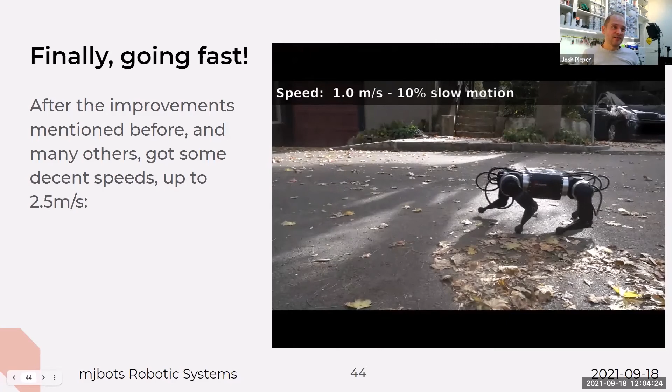This video sequence shows a number of increasing speeds, starting at like 0.5 meters per second, which is 1 mile an hour, and going up to 2.5 meters per second, which is a decent jog for a person. This gait engine is still relatively simplistic, and it doesn't work that well if you have flight periods. So even at the fastest speed, there's only a very brief period where all 4 legs are off the ground.

The hardware is capable of more than that, but the gait engine can't really handle it. It becomes unstable if the feet are off the ground for more than a few milliseconds each step. At 1.8, it's still all roughly on the ground. At 2, you can maybe start seeing a very tiny bit where all the feet are off the ground. When it gets up to the fastest speeds, it's more like 5 milliseconds or so per step that all the feet are off the ground. But having the ability to record the data and step through video frame by frame, comparing it with readings from the legs and the IMU, really made this possible.

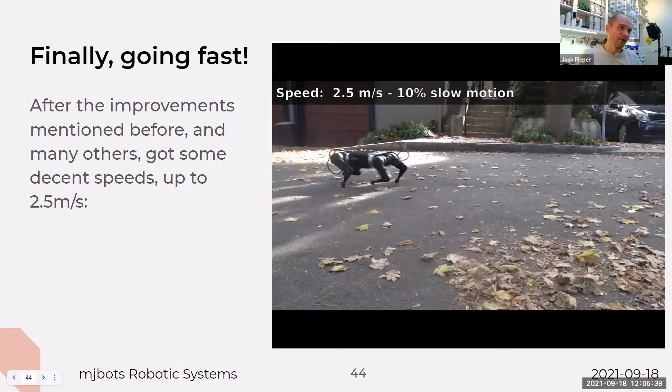So here's the high speed run at 2.5 meters per second. You can see it's a run - it has all the legs off the ground very briefly. And it can do that, but it has to be relatively flat to achieve the high speeds.

All right, so that is my tour of the Quad A1. Now is my shill time, very briefly, because we're over time.

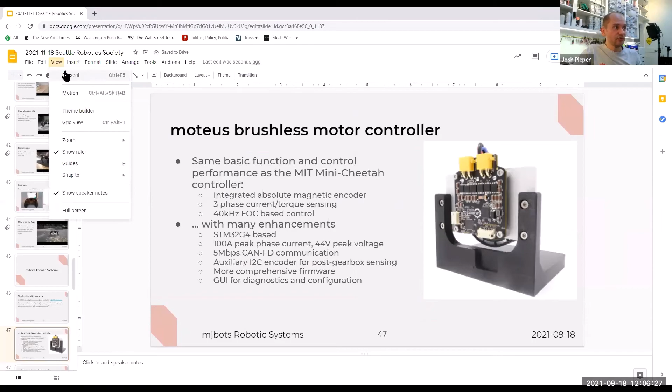You can get the bare controller - this is the Moteus controller. It can turn any brushless motor into a high-performance servo. It's expensive compared to other motor controllers, or hobby ones - it's like $89 - but that's not too bad for a brushless motor controller, which are typically much more expensive. It does a 40 kilohertz control loop, so it has very high performance torque and bandwidth control. You can do things like the Quad A1 or other projects of that complexity with it.

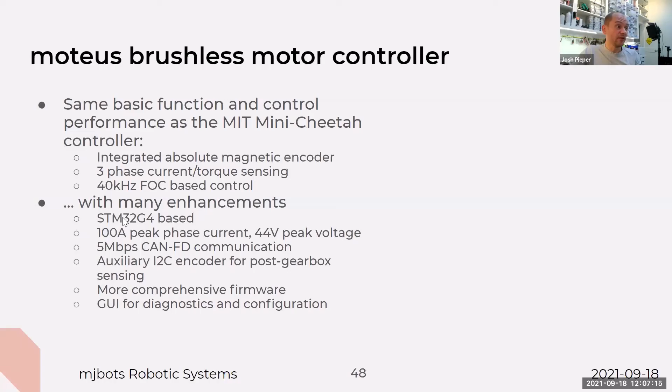It's similar in design to the mini Cheetah controller, but has a lot of enhancements and was developed independently. It has higher voltage, higher current, higher bandwidth communication. It has a secondary I2C port, so you can put a second encoder on the output. And it has a GUI you can use for command and control, which I think I showed in a second video - well, anyway, we'll show it eventually.

I also have the qdd100, which is the servo used in the Quad A1. It has a unique combination of high speed, high torque, and low mass - probably the most competitive on all these axes anywhere you can buy. It's expensive for hobby things, but it's under $500 for something that can do 600 RPM, weigh under half a kilo, and still put out 16 Newton meters of torque, which is what the Quad A1 needs, but a lot of other things need that too. That's a pretty powerful combination, and it has a Moteus controller inside.

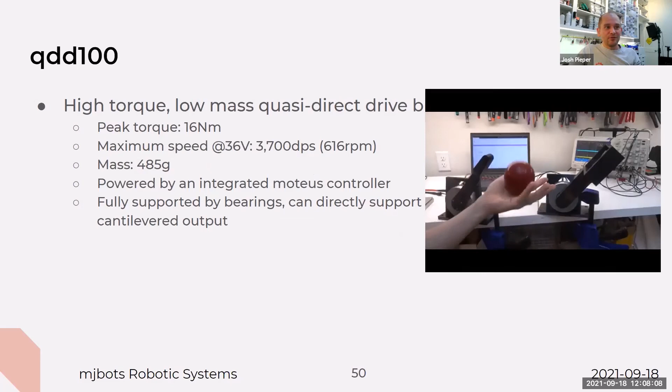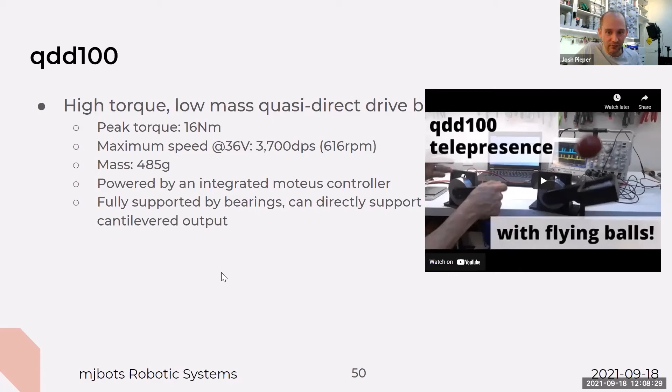Here's a demo of me running two of them virtually paired with a Pi 3 hat. I'd call it virtual teleoperation - that's it throwing a 1 pound ball. I'm just using one and wiggling it, and the two motors are synced together, so you can move either one and the other one moves. It's like they have a chain connecting them, but it's all just software by wire. You can do crazy things like arbitrarily change the gear ratio as you go along for other purposes.

We have sold a half dozen Quad A1s now, though they're not officially listed for sale, just from people who ask about them.

It has similar specs to Mini Cheetah. It's not quite as capable, but it's customizable and all open source. All the firmware and PCB designs for these things are open source under an Apache license, so it's permissive—you can do whatever you want with it. Granted, that's kind of academic in today's COVID world where you can't buy anything, but when we get back to where you can buy things, it might be more useful.

I've got some glamour video I took for an update in November last year. The Quad A1 can go around on lots of different terrain—grass, gravel, pavement, hills, all those things—and this is with a relatively simple gait algorithm running on just a Raspberry Pi 4. As mentioned before, this is all just teleoperated.

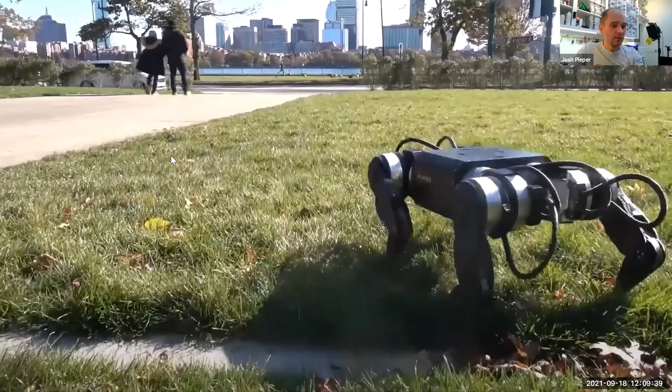Let me switch to the next slide.

Both the controller and the servo have dev kits, which aren't too expensive and have everything you need to get started. That comes with a power supply, a CAN FD converter, and brackets, so you can just plug everything in and in 5 minutes be typing at the GUI, doing force controlled motions or arbitrary trajectories. A lot of people really like that.

Skyentific made a video showing that, so you can see that. This is a video of that UI.

There are pure Python libraries for all of these that let you command and control them in Python, as well as you can just make the CAN frames yourself. This diagnostic utility exists on their GitHub, as I said, everything is Apache open source.

We also have a Discord—it seems what all the cool people are using nowadays—so you can get support 24/7, either from me or from other community members. We have lots of people from around the world; we have customers for mjbots from 6 of the 7 continents, only missing Antarctica so far. So there are people from every time zone, and there are a number of published projects.

Stanley is one that, if I could play this video—I have to present, I think. There it goes. So I played it and then it, of course, stopped.

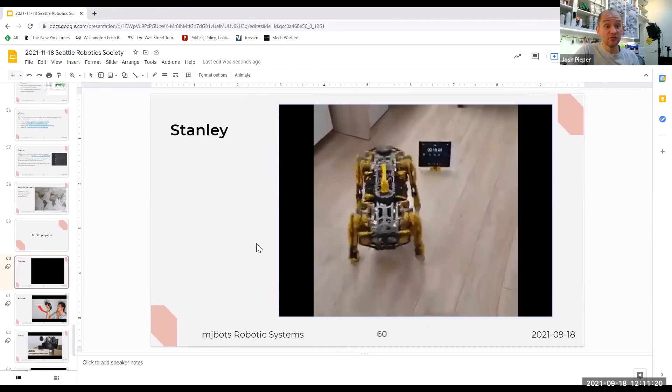This is an alternate quadruped design based on a capstan system, which uses Moteus controllers, but it uses a capstan reducer, which is much lower cost but takes a lot of manpower to assemble. Here's a demo of it moving very fast—that's real time, so it can spin pretty darn quickly. It just has off-the-shelf brushless motors and a bunch of 3D printing and cable design.

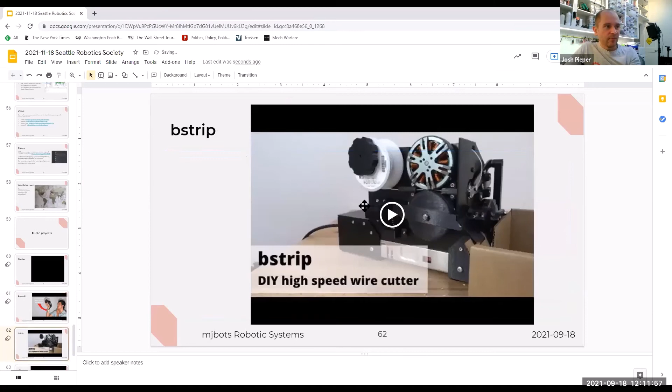I made an automated wire stripper, which was—is this gonna play or not—which shows how fast and precise the brushless motor can be. That's in real time, cutting and stripping wires, and now it goes into slow motion.

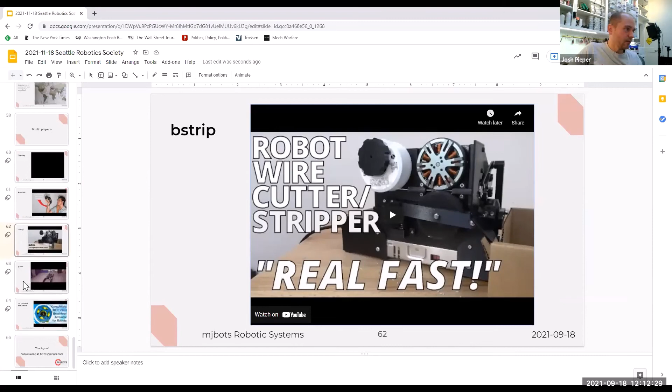So you can see it goes—this is just operating a manual wire stripper programmatically. It strips one end, cuts the insulation, puts it a little bit forward and strips it off, and then you can go back and see it in real time. I actually build a lot of harnesses, so I use that to cut and strip all the wires for that. There's also another one, and Skyentific has done many videos with Moteus controllers.

In order to keep this relatively limited, I will call that the end of my presentation.

Thank you for humoring my presentation—it wasn't overly long once you count the disruption in the middle, but. Oh, that wasn't your fault. So we're happy to give you a little extra time for that.